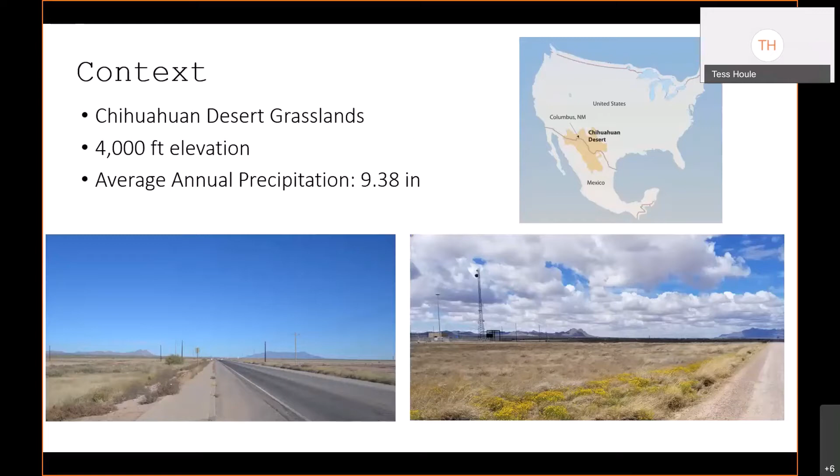The photos along the bottom show the landscape adjacent to the site—Chihuahuan Desert landscape or grasslands with mountains in the distance. It is at 4,000 feet above sea level, and the annual precipitation is right about 9.4 inches, with most of that coming during a late summer monsoon season in a typical year.

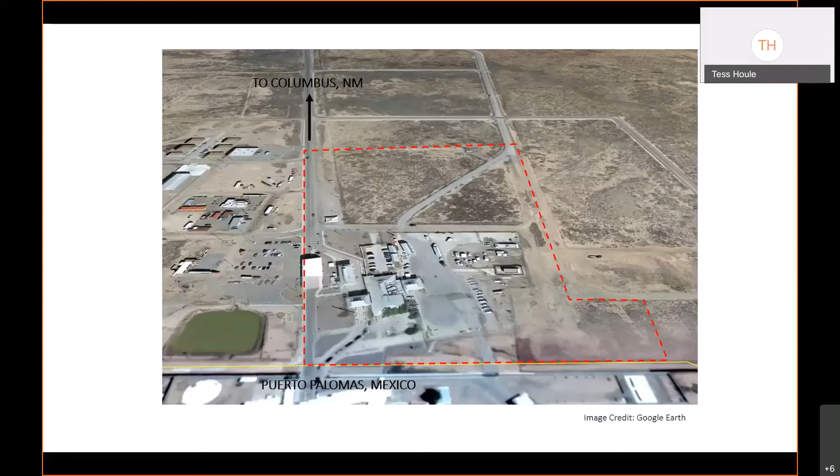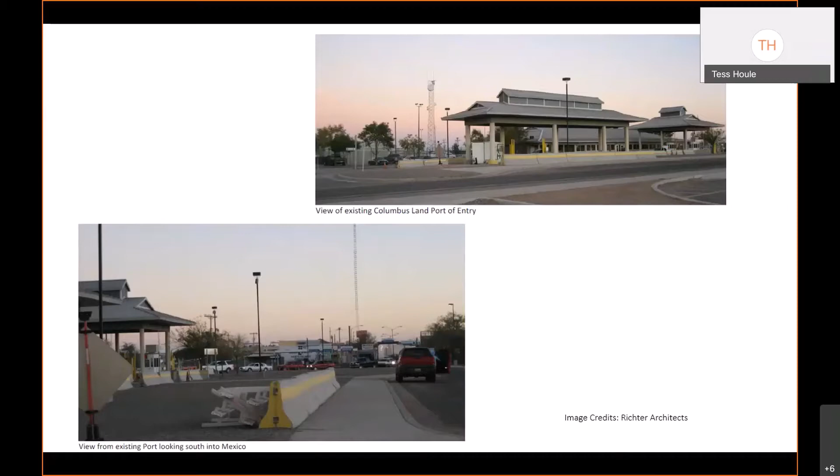In red, you see the pedestrian circulation, which includes students who cross the border daily to attend school in Columbus and Deming, New Mexico. In purple, you see school bus drop-off and public transit. In blue, you see private vehicles, and in green, you see commercial vehicles. In yellow, you see the primary circulation routes for port employees.

Safely accommodating and separating these user groups was a primary driver in the site design, and of course maintaining the port security requirements, which are very stringent. As Aaron said, the client was the General Services Administration, but there are many federal agencies that use this port and have employees in the port.

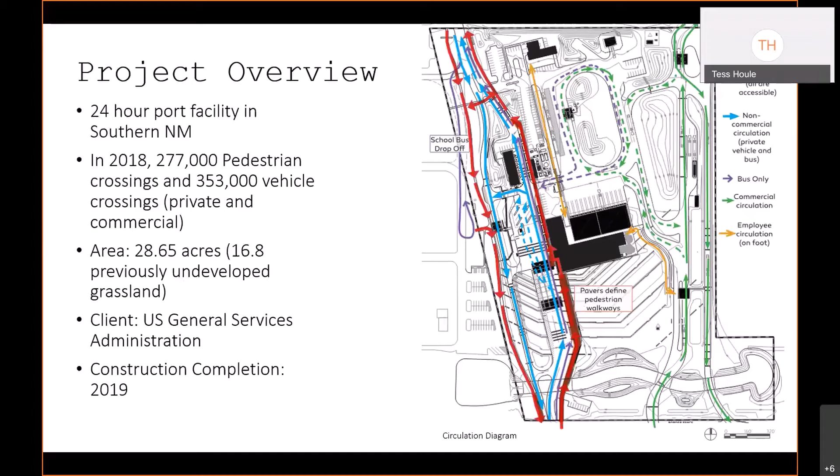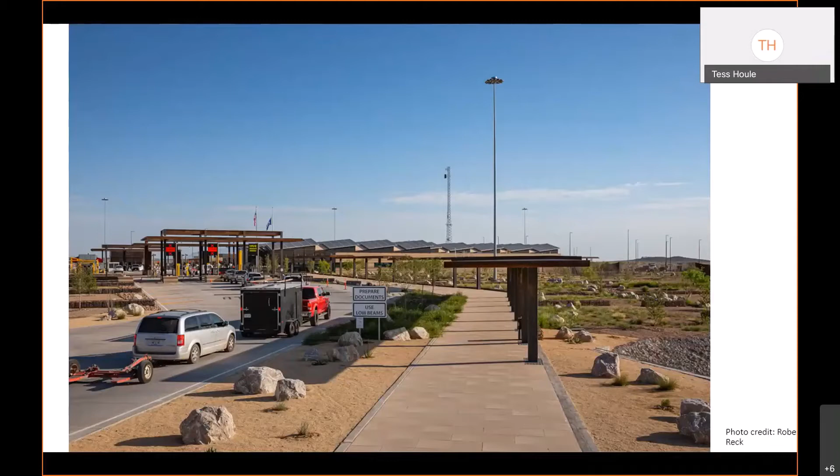And I'm going to turn it over to Aaron to go over user feedback and sustainability goals.

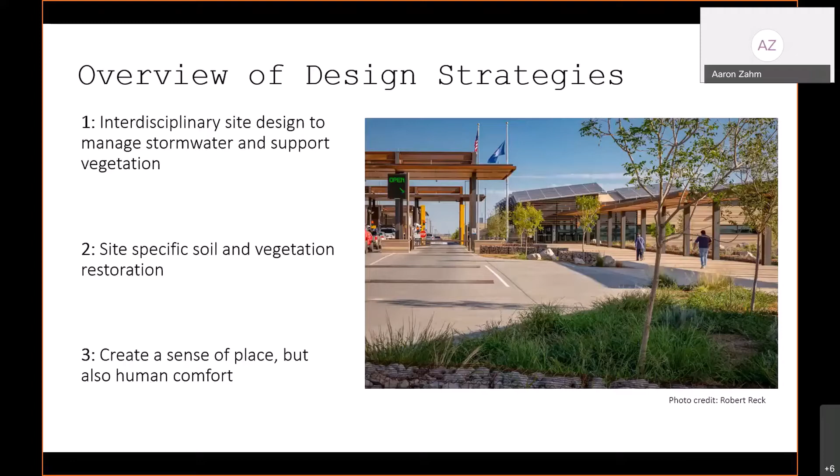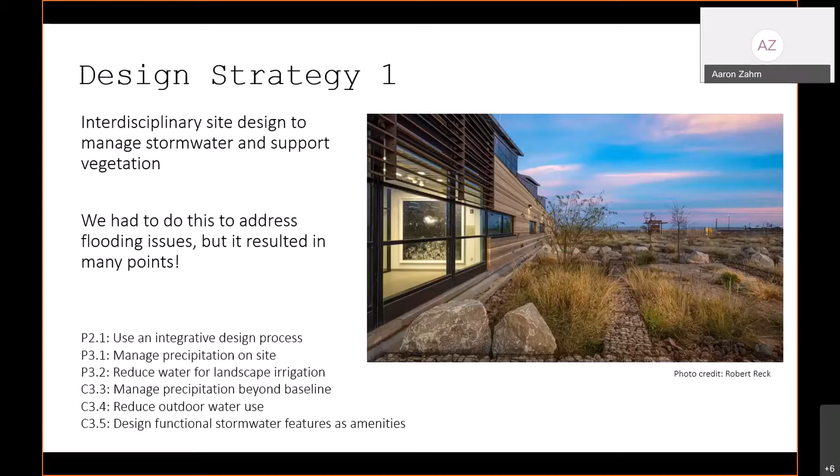Another point is that we had very poor soil infiltration. Sending water to one low point, given the very poor infiltration, would mean standing water for long periods of time. So the strategy was also to distribute that water across the entire site to give it a better chance to infiltrate more quickly — again, not making it disappear or treating it as a forgotten issue, but really highlighting that water in the landscape.

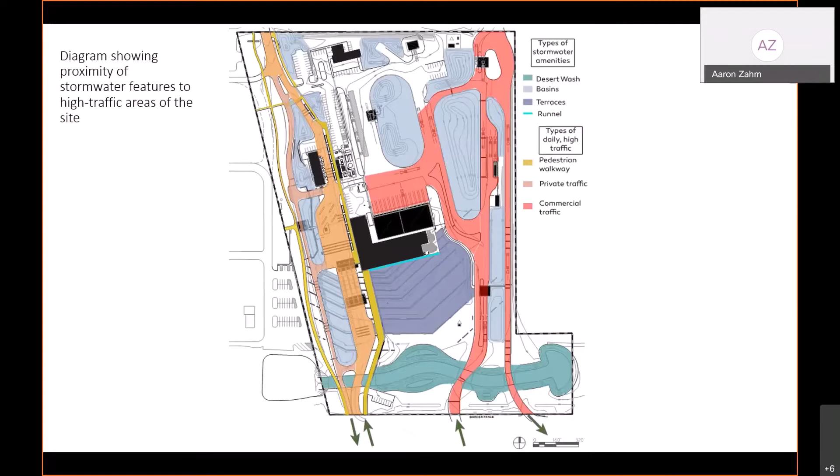Along with that was educating visitors to the port. This is interpretive signage that pedestrians can see as they walk through, explaining what's going on — talking about the very limited rainfall and its tendency to come in large storm events, how the design and landscape in front of you functions, and how we're putting that stormwater to beneficial use in a very harsh environment.

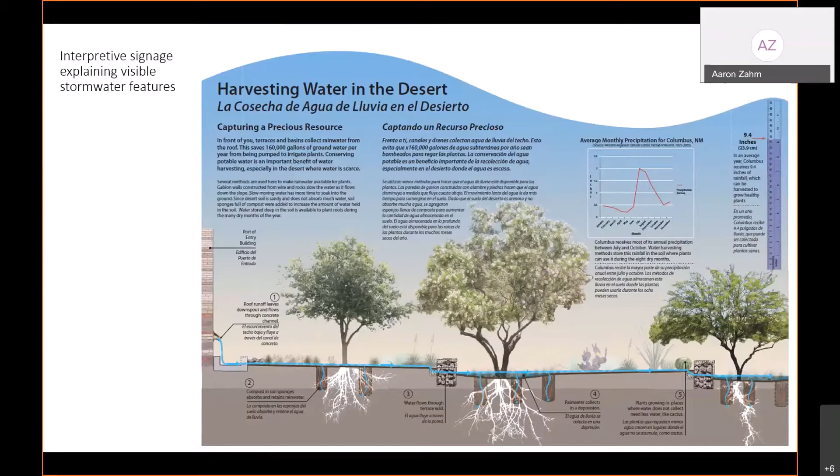One issue we'll discuss is the soil and salinity. There's very high salts in the soil, plus inundation of water for periods after storm events. So we had to be careful about plant selection that can handle salts, drought, and inundation at the same time. It's a real challenging combination.

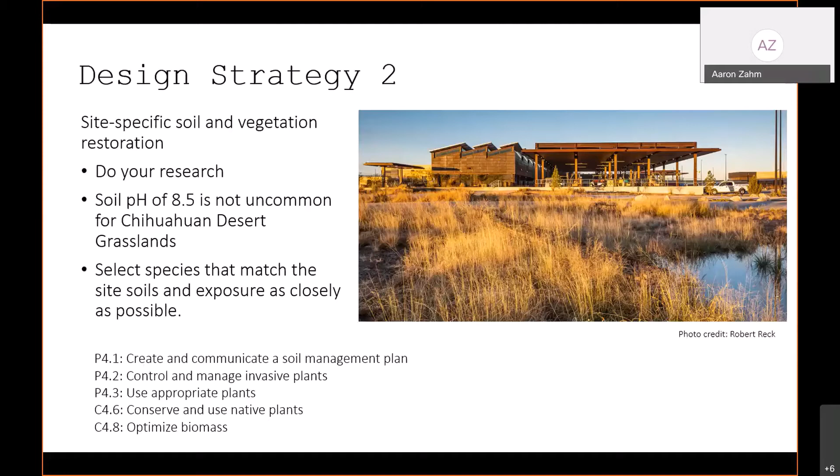This image is pretty early in the project, when construction is just wrapping up. It's nice to show the juxtaposition of this highly industrial port facility and inspection equipment adjacent to our goal of creating a restoration of a desert landscape. I'll pass it to Tess for the next design strategy.

The last strategy we want to emphasize is that this design tried to capture the sense of place and embrace the local ecology. In the Chihuahuan Desert, spring and fall can be very comfortable for people, but you also have to acknowledge that summer can be very unpleasant. So how do you provide human comfort in an otherwise uncomfortable environment?

The parts we tried to embrace were the open views, the beautiful vegetation, the view of the mountains in the distance, while keeping in mind that it's a very hot place and what we can do to mitigate that heat. With site design and location of human spaces, we made those a little more comfortable. There you can see a few credits earned through this design strategy.

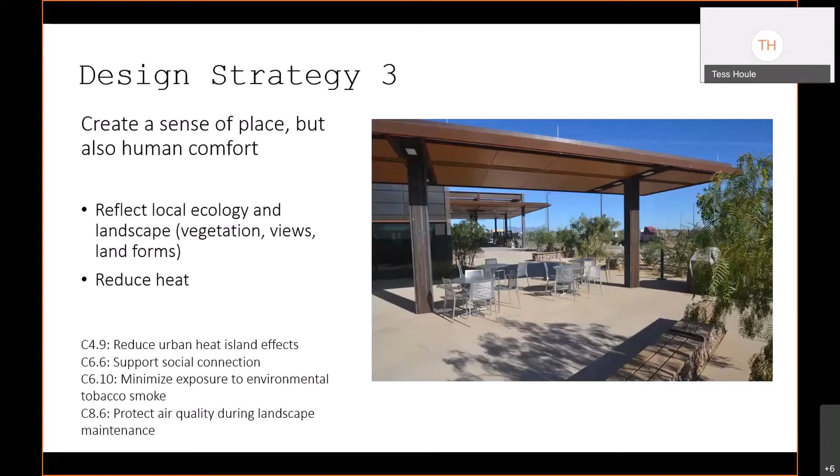This is an example of the employee patio you saw on the last slide, from a different angle. Here you can see different size areas provided for different size gatherings. The employee patio is east of the main building, protected from the primary direction of winds from the west and the intense western sun. We provided seating, views to the south and west, recycling and trash receptacles, shade from both the structure and desert trees starting to grow in, and a grill for employees to use.

Again, the high SRI materials help reduce heat and improve human comfort.

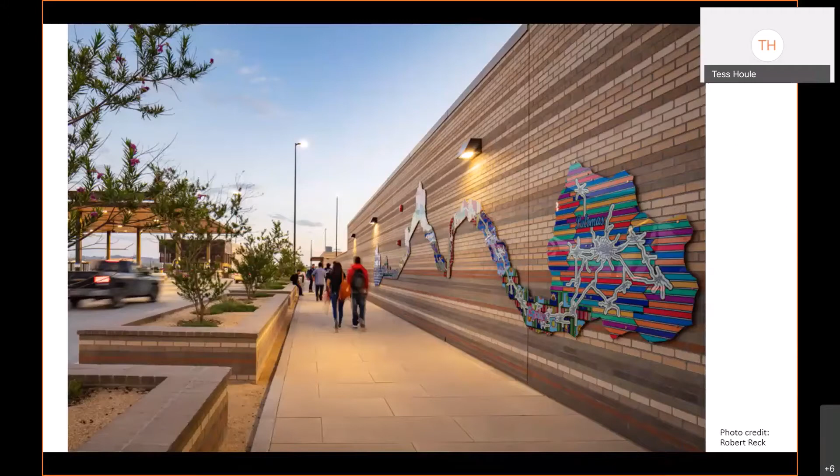This project also included public restrooms, visible in the distance where that shade canopy is behind the student travelers, and some public artwork to improve the experience for pedestrian travelers.

I think one of the really cool things about doing the site documentation was that we went through the process of generating performance metrics for the site that we might not otherwise do for a project. So seeing these numbers was really interesting for us and very confirming of the effectiveness of these strategies that we've talked about.

Aaron talked about the stormwater management site design and strategies, and that results in about 2.5 million gallons of stormwater being directed to the landscape, and that's a direct offset of irrigation needs. The irrigation for this site was designed so that most of the system can be turned off after an establishment period. After that period, our EPA WaterSense calculation showed we were at 97% below the baseline, and 76% below the baseline during that initial establishment period. So that was some pretty great confirmation to get.

Aaron talked about the restoration, vegetation, and soil strategies that resulted in 12.5 acres of restored grassland. All of the paving and roofing materials were high SRI for heat island reduction, and at maturity, over 1 acre of the pavement will be shaded by trees and shade structures. Here on the right, you can see an example of the shade being provided by the shade structure.

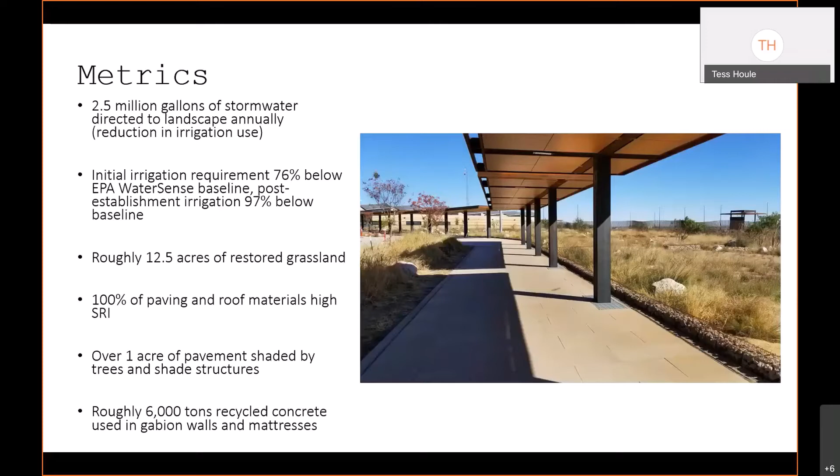In this slide, you can see the recycled or salvaged concrete being used in the gabion mattresses in the desert wash stormwater management area, and then the water harvesting terraces behind that.

We're going to go over a few of our tips and lessons learned. As Aaron said, the earlier you can start the SITES process, the easier your documentation process will be.

Another thing we found very helpful was to make coordination checklists to communicate with the different disciplines and also with the contractor, and it really helped to break down the documentation into bite-sized pieces for each team member to be able to more quickly and efficiently address their part of the documentation.

We held regular team communications specific to the SITES process, so those were weekly calls as needed, and then became monthly calls later in the project. Another suggestion is to really over communicate and get everything in writing. There are a lot of details to the documentation, so to keep track of it, it's really necessary to over communicate and make sure you're meeting your project goals and certification goals.

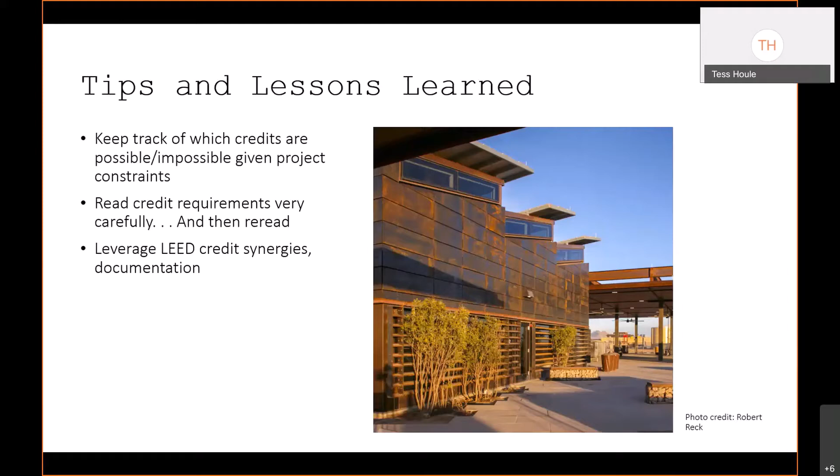So I'm going to turn it back to Aaron to wrap up the presentation.

We were asked to give some commentary on what added value the SITES certification brought to the project. A big one for us is it provided a mandate that everybody had to stick to, and we really had to follow the landscape best practices, not only through design but into construction and also into operations and maintenance. You get to that period where as designers we sort of lose control, so being able to influence the operations and maintenance guidelines for the site means it can live on successfully when we're no longer involved in the project.

It was also a very educational process, not only for us, but for the owner. And that leads to the next piece about education on landscape aesthetics and setting landscape expectations.

So we had to help steer and educate the client and the users away from an expectation for an ornamental landscape, more typical of other large federal facilities. By educating the team, and having the SITES influence provide leverage for really looking at this instead, we said, no, we're going to restore a native landscape that is very beautiful, and will also reduce initial costs because we're not overly amending the native soils or working extra hard to put stormwater in pipes to send it off site, but also reduce maintenance costs.

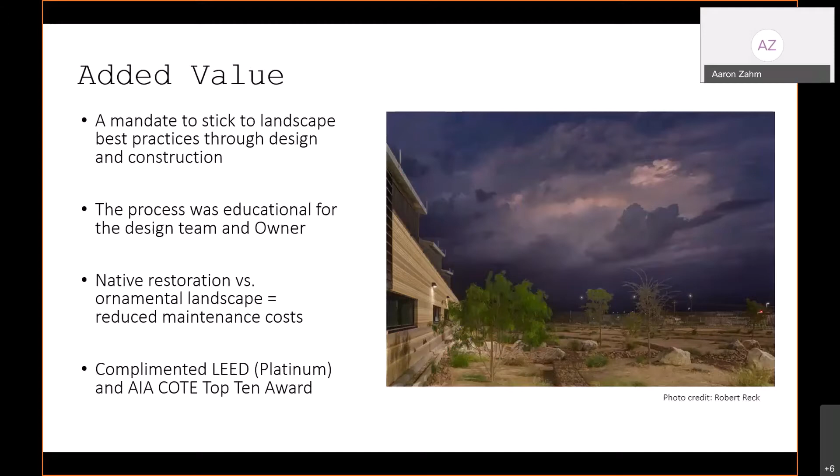So that's it for Tess and I. We appreciate the opportunity to talk about our project, and we will take any questions that you have for us.

Great, we had a couple questions come in. This is Paul from USGBC. There were some general questions about the project, like people were surprised that you could have a land-based port, and were impressed by that. They wanted to know how the school bus pickup and drop-off worked, and also asked about the surrounding property owners, since it was hard to tell who they were in that region. Can you give us a little more background on those things?

Yes, so for the school buses, I'm not sure exactly what happens on the Palomas side. My understanding is for the most part students walk, but there may be some busing on the Mexico side to the port. Those students walk across every day, passing through the port facility and checkpoint, then through the pedestrian zone, where they get on a school bus that takes them just north of the port to either Columbus, which has public schools, or to Deming, which is where the high school is, about 30 minutes north. That happens every day, and the reverse happens in the afternoon, with school buses dropping students off. They again pass through the port on foot and meet their parents or guardians on the other side. That's how it worked for school children, who are a primary pedestrian user of the port.

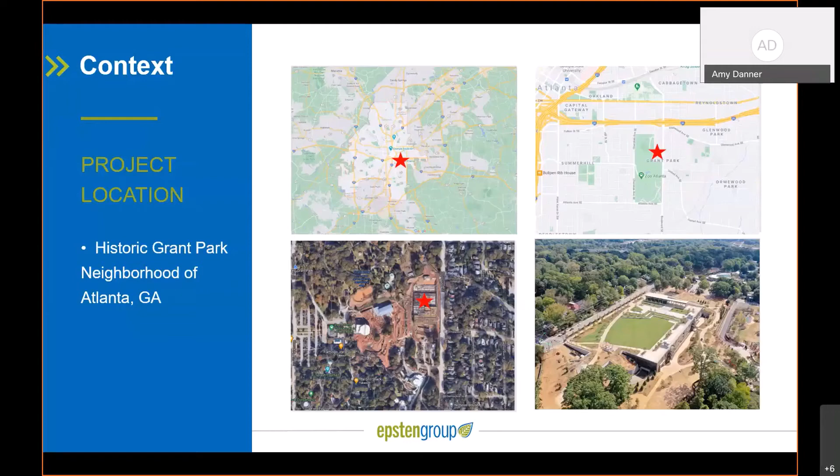Some of the constraints the project faced were related to the existing conditions of the site. As you can see mostly in the bottom picture, there's a substantial sloping and grade change between the lot and the street level. This was previously a surface parking lot with trees located in the medians. It was 8 acres of asphalt parking, and now it is a semi-submerged parking garage. We've preserved and added vegetation, which is now over 8.6 acres.

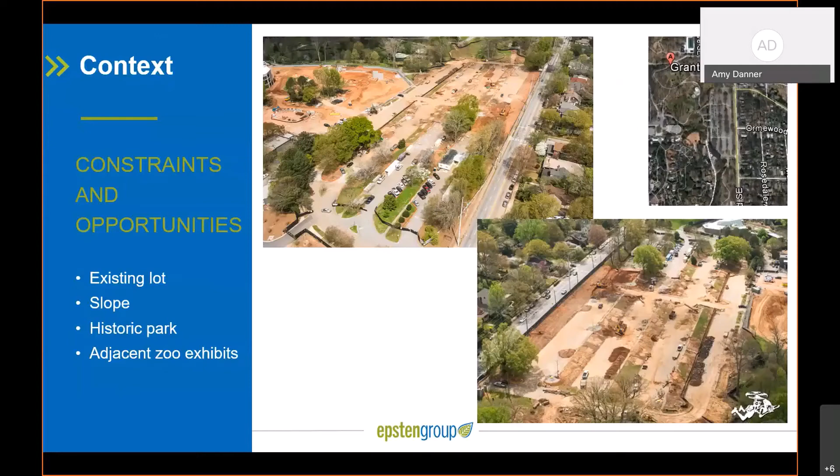More of the constraints dealt with the historic district in which the parking lot is located. It is adjacent to Zoo Atlanta. In the bottom picture, you can see two buildings to the left, one of which is the historic Cyclorama building, and the new elephant barn of the zoo, as well as the skyline views of downtown Atlanta in the background. Being able to maximize those views was a unique opportunity.

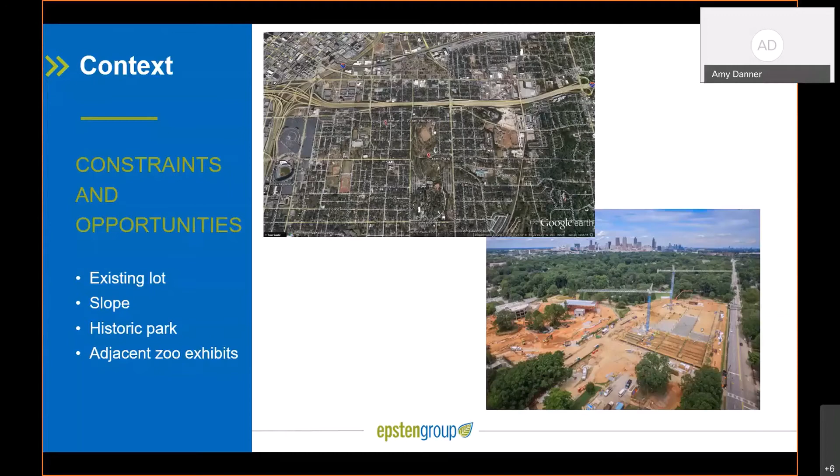A constraint, as well as an opportunity, was the location in the surrounding neighborhood and Grant Park. There was both pushback and support from the community regarding different aspects of the development of the project, which we'll get into a little bit later.

But some of the constraints were overcome through the design of the site. The parking structure became semi-submerged and recessed into the slope, and pursuing the SITES certification helped to address the societal concerns by ensuring that the vegetation would be protected, restored, and improved upon in ways that would benefit the community as a whole.

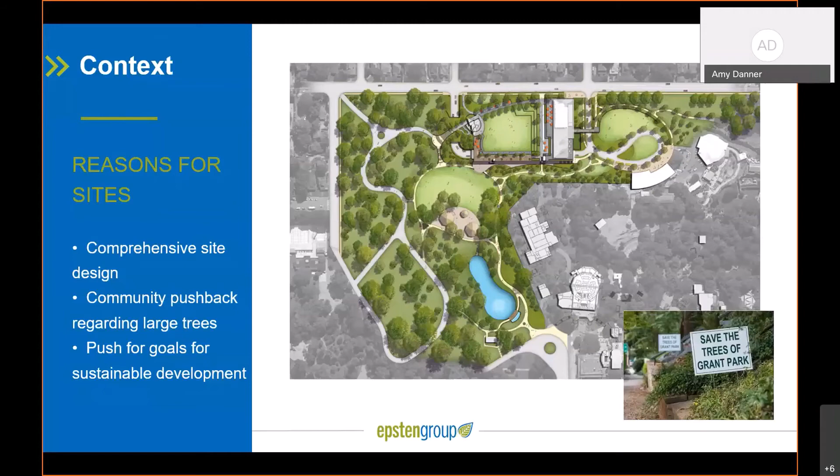Next slide. Rudy will now dive in further to some of the goals and the design elements of the project.

Going off some of the sustainability goals, the City of Atlanta and the Department of Parks as clients, in 2010, outlined sustainability goals for the city as a whole, including a minimum of 10 acres of green space per 1,000 residents in the city, as well as protecting and restoring the city's tree canopies so that there's 40% coverage at a minimum. They wanted to create and maintain park space and park systems which helped promote and encourage sustainable development while implementing landscape and facility renovations that reduce the overall maintenance costs. So of course, SITES kind of lines up perfectly with that.

From a project goal standpoint, it was to really increase the overall native vegetation while simultaneously increasing the parking capacity and reducing the congestion within the area. But given the overall rainfall within Atlanta, one of the major goals of the project was really to place an emphasis on reuse of stormwater through the use of cisterns and the revitalized on-site management pond, which conveniently enough was able to account for 100% of any irrigation demand for the project as well.

And then because of some of the feedback from the city, one of the major goals was to protect and restore specimen trees, which we defined as old growth trees of at least 30 inches at diameter breast height. We made sure that these were completely protected and preserved from any and all harm.

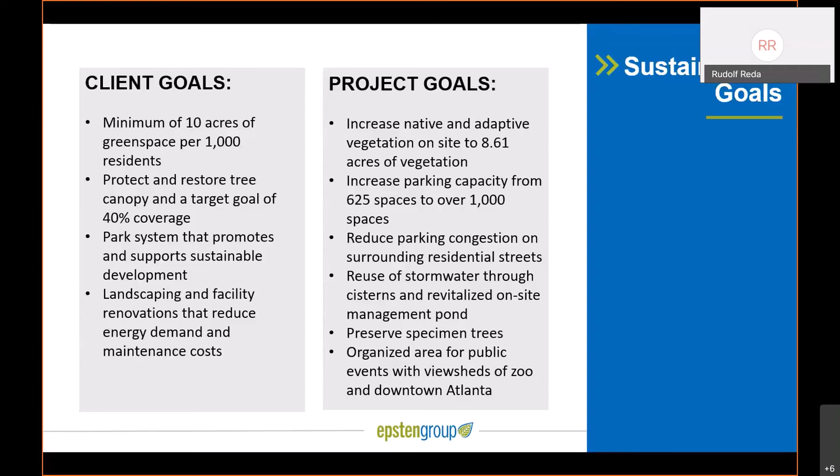So these were just some of the design examples for the project site, as well as some of the credits that each attribute achieved. They were the green roof, the comprehensive stormwater management, and then just an overall human experience for the site to ensure that the site is a destination rather than just a parking lot.

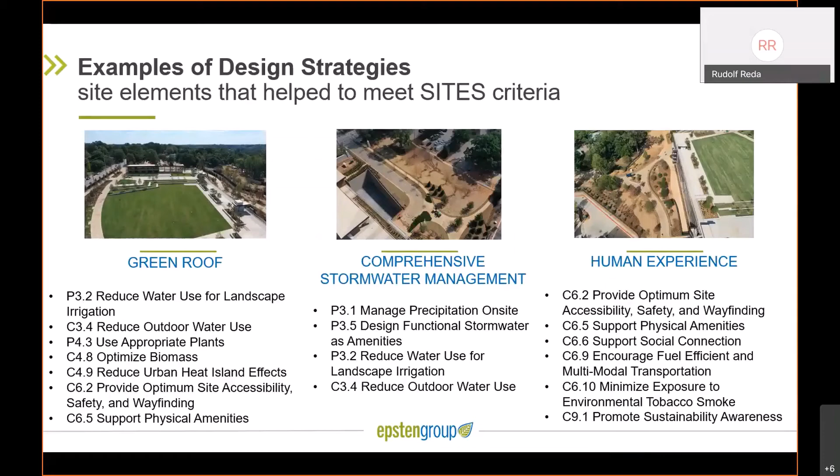So the first strategy was the green roof. As this was initially an open parking lot, the redesign of the site into a parking lot with a green roof really allowed for a transformation towards the overall green space goals of the city. It also allowed for an increase in the quantity of overall open space and the quantity of vegetation and biomass throughout the project.

Then secondly, through the increased use of vegetation and high SRI pavement, it really allowed for a reduction in the overall heat island effect from the project, which coming from a black asphalt parking lot to a luscious green roof with vegetation really makes a huge difference in the overall microclimate of the area. Overall, this project, through the use of the green roof, has actually become one of the largest green roofs in the Southeast.

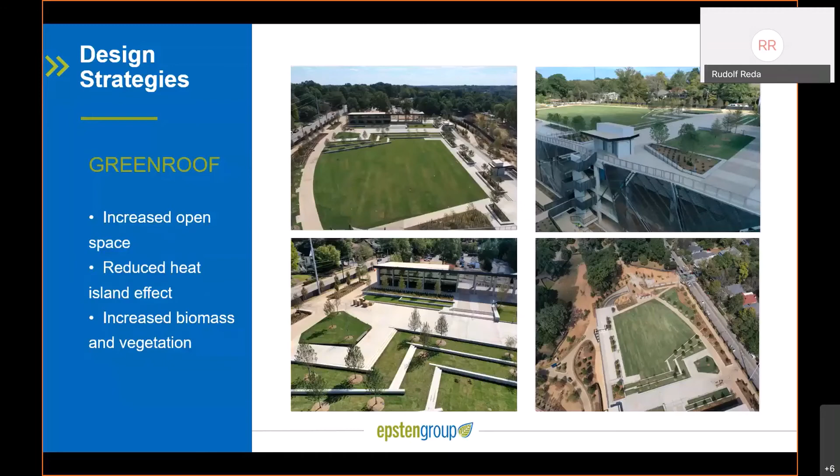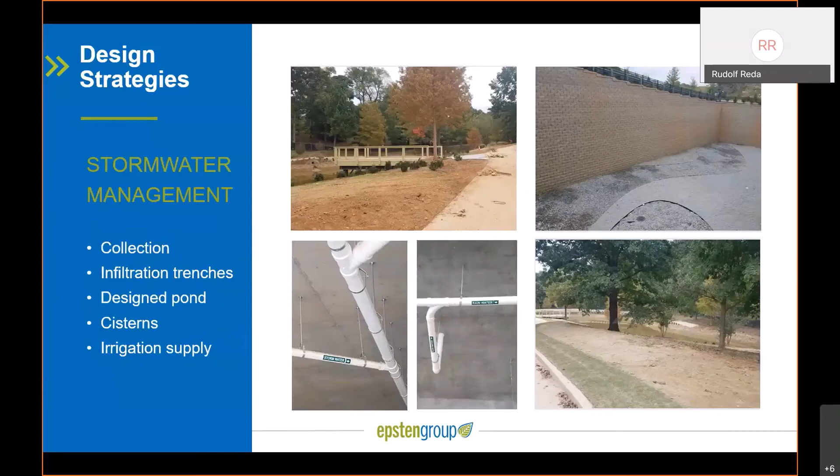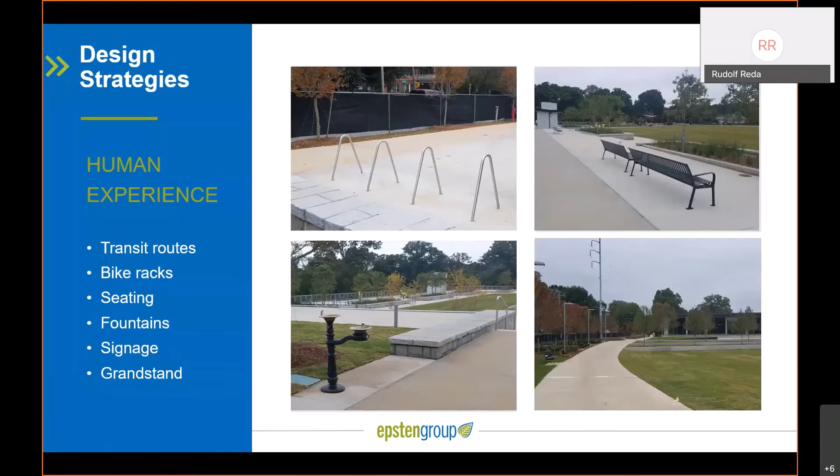So some lessons here: the first really ties back to Tess and Aaron with regards to getting the project set up early on, since they noted issues with that. We initially were not considering SITES, but as we were doing LEED and Parksmart, and through feedback of the community, we decided to seek SITES as well. Once we decided to seek site certification, we set up a design charrette and did a credit-by-credit walkthrough to determine the applicability towards the project.

Following some of the overall SITES prerequisites, P2.1 and P2.2, we set up the design team. We hosted a pre-design charrette, as well as a pre-submittal charrette in this case, and discussed all the variables, which really helped the project get set up as soon as possible and ensured a smooth and consistent process throughout the review. Then one key component of achieving gold for this project was frequently comparing the credits being pursued against those not being pursued.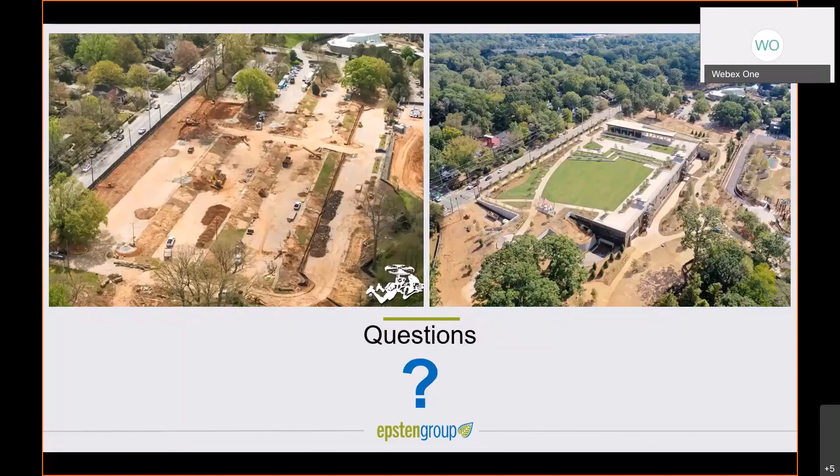Thank you, Amy and Rudy. That was really fascinating. It's definitely much more than a parking space, and it's very exciting to see the effects that sites can have in impacting the people as well as the project itself in terms of education and policy change. So that's really wonderful to see, and I look forward to following up and learning more as it gets used.